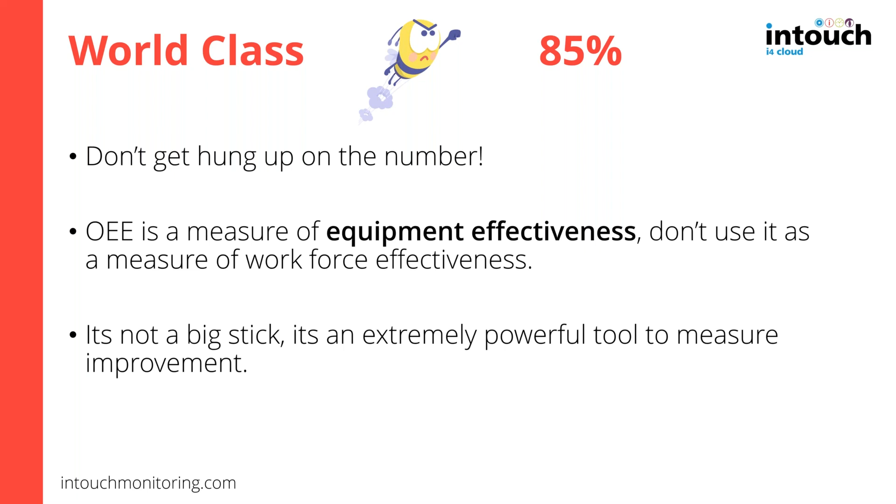So why use it? It tells us if a piece of equipment can do what it's meant to do, and if it will enable you to deliver what you are meant to deliver. So as I say, it's not a big stick. What it's really good for is helping you identify what your losses are and what is causing them. So if you are not meeting demand and are operating at a low OEE, you know that there is room for improvement. If you are not meeting demand and are operating at a high OEE, you know you've got a capacity problem. And even if you are meeting demand, with OEE you know if there are improvements there to be had. And at a really high level, I like these statements, but we need to delve deeper to understand where we are losing out and what we need to do to improve.

And this is where OEE really shines. When used correctly, it's an excellent tool to help you understand your losses and drive improvement. And it can also be a really good educational tool and be really quite motivating for the whole workforce.

So how is it calculated? I think anyone that's even lightly touched OEE knows that OEE equals availability times performance times quality. And if you don't know this, then I'm probably going to be missing some stuff out. But hopefully, as you're here, you do know the basics. But if not, there are lots and lots of resources available online.

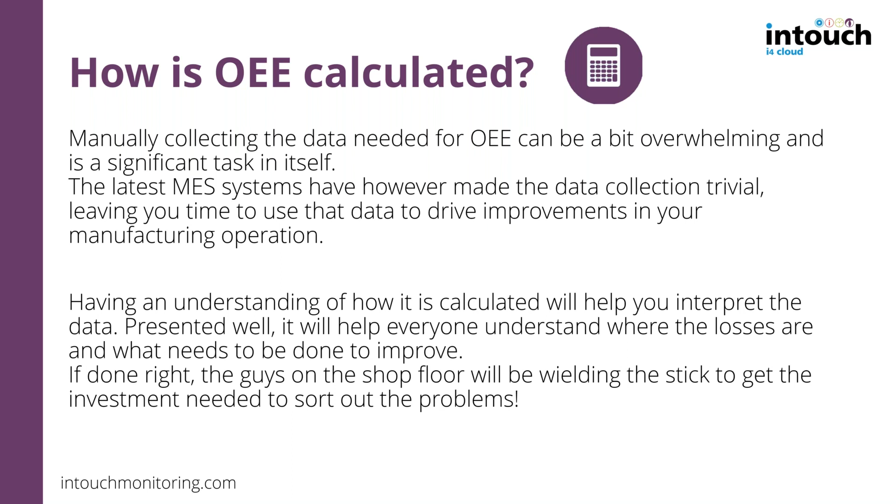And when it's presented well, the data can very clearly highlight this. If it's used as an improvement tool and as an educational tool, then you can get the whole workforce behind it. So OEE in itself is quite a useful benchmark, but we do need to dig further to be able to analyse where our losses are and what we can do about them.

So as mentioned, I'm not going to go into the maths in any detail, but it is important to understand that OEE is a ratio and so can therefore be derived from any relevant units. It can be very powerful to express it as a ratio of durations, how those losses relate to time. And lost time is something that's very tangible.

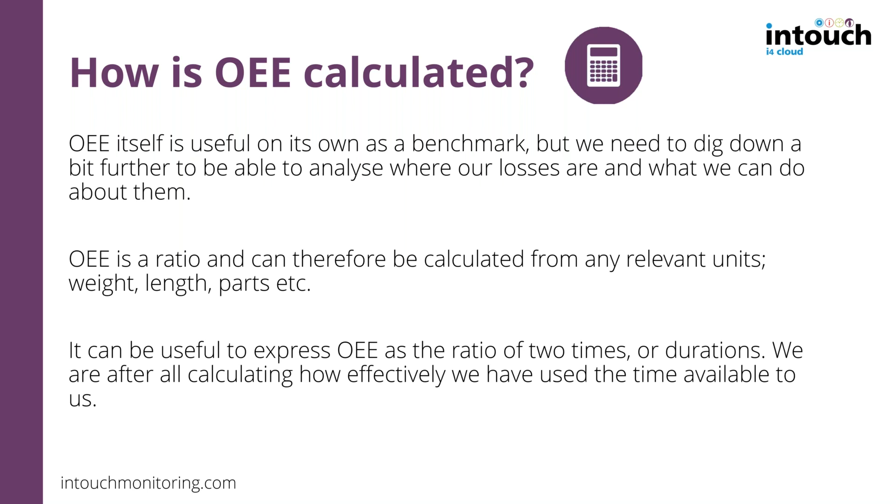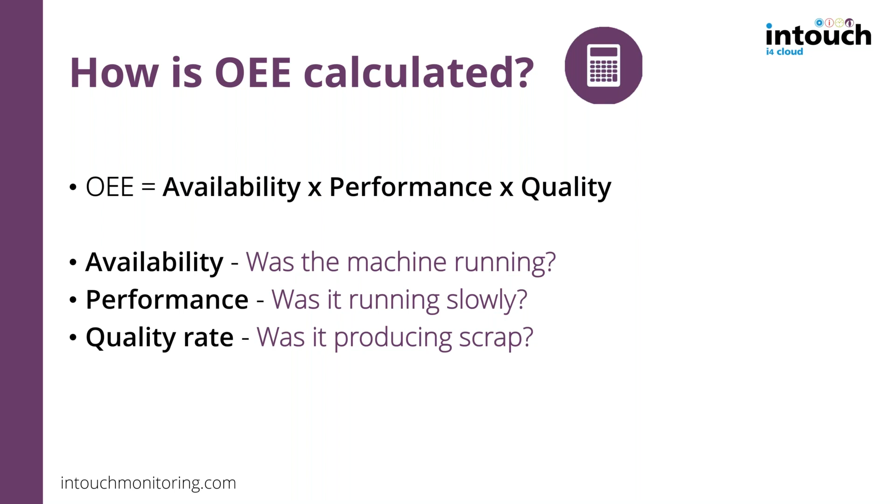So we said that OEE equals availability times performance times quality. So it's made up of those three distinct KPIs. So availability, was the machine running? Performance, was it running slowly? And quality rate, was it producing scrap? And if we try to stick to representing the information as times, it can be very nicely represented by what we call the OEE staircase.

So starting with availability, the availability rate is a measure of how successful we have been in keeping the machine running, simply calculated as a ratio of run time to available time. And so this, on our staircase, we're highlighting the losses due to unplanned downtime.

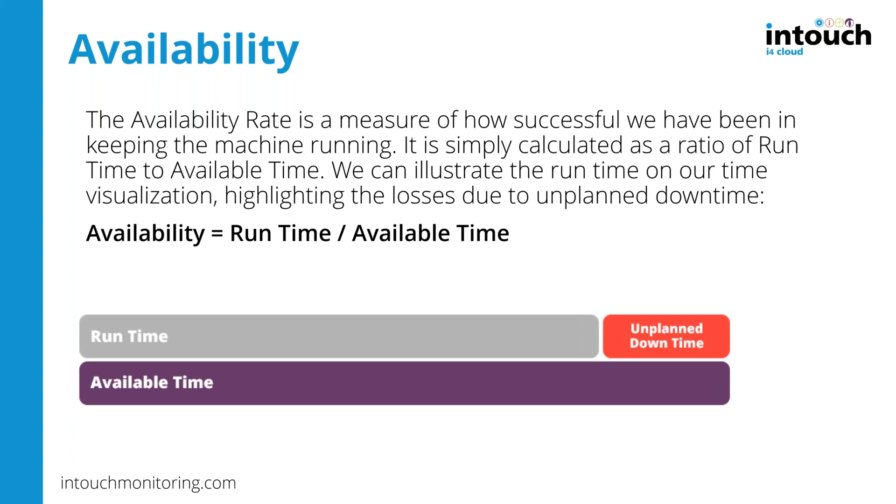The performance is a measure of how well the machine ran when it was running in terms of rate of production. So it's a ratio of the parts made to the number of parts you should have been able to make in the given run time. I've got here performance equals standard time produced divided by run time. So that's essentially just converting the parts made into time.

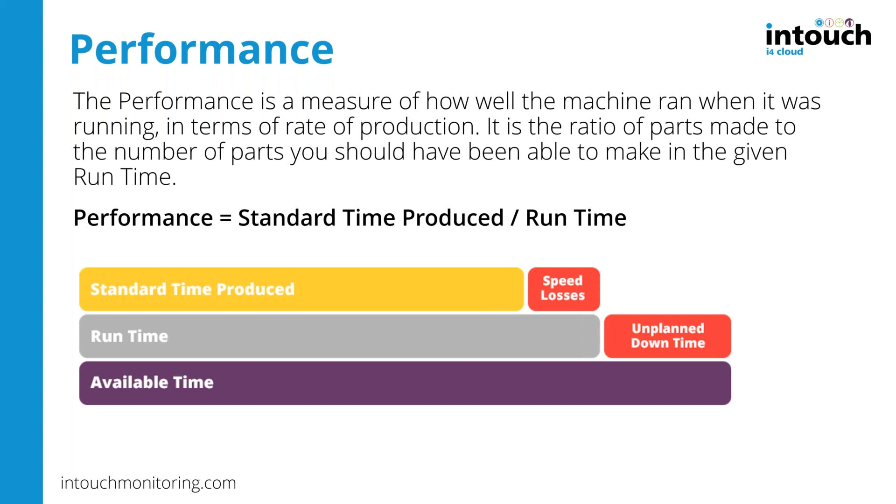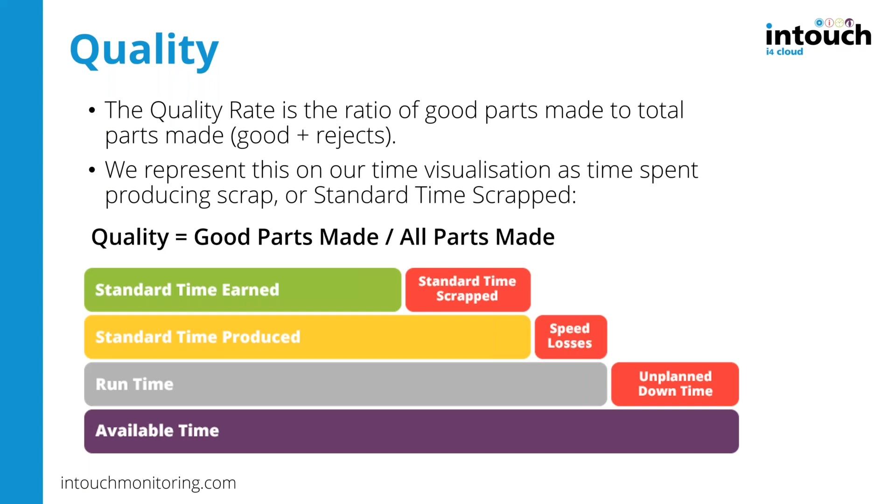So parts made times standard time or standard cycle is the time it should take to make the parts you made if the machine is running at its maximum possible rate. So we call that the standard time produced. And quality rate is the ratio of good parts made to total parts made. And again, we represent this on our staircase as time spent producing scrap or standard time scrapped, and time spent producing good parts, so standard time earned.

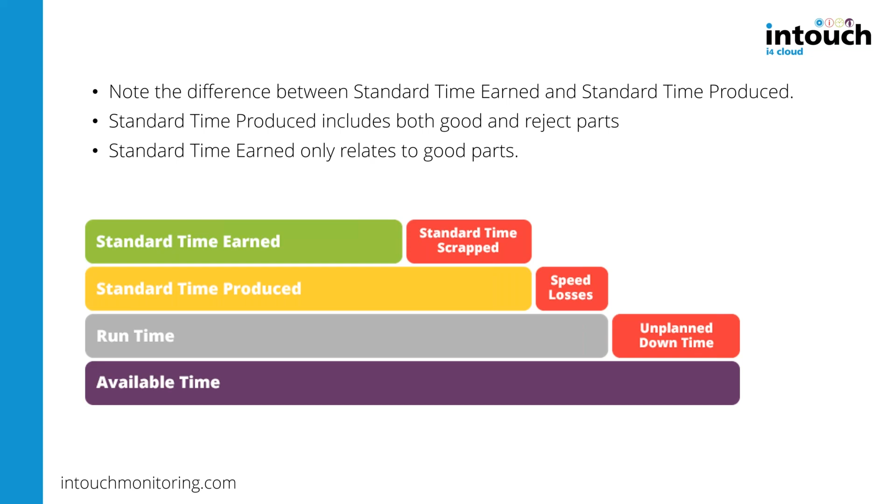So it's good to notice the difference there on our staircase between standard time produced, which includes both good parts and reject parts, and standard time earned, which only relates to good parts. So you can see that the productivity of the machine is broken down into a series of ratios of time periods. So the availability equals the run time divided by the available time. Performance equals standard time produced divided by the run time, and quality rate is the standard time earned over the standard time produced.

We know that OEE equals availability times performance times quality, and therefore it equals standard time earned divided by available time. So I said I wasn't going to go into the maths, but there is a breakdown of all of those calculations on our OEE explain page. But the staircase is a great way to look at how the different losses chip away at the time you had available to make a good product.

So we can add one further level to our staircase and include planned downtime. Near the beginning of my presentation, I mentioned manipulation of data and people trying to make the numbers look as good as possible. And so it's a good time to come back to that. Planned downtime can be one of the most contentious variables when monitoring OEE. Different people have different ideas about what should and shouldn't be included in planned downtime.

So for me, non-work shifts are clearly planned downtime. So if I'm running 5 days a week and I don't run the weekends, those non-work shifts are clearly planned downtime. But what about tea breaks or maintenance, no orders, no operators? I've heard many compelling arguments for and against including these as planned downtime. I've been in many meetings that have gone on for 3 or 4 hours where people have discussed and argued about what should and shouldn't be included.

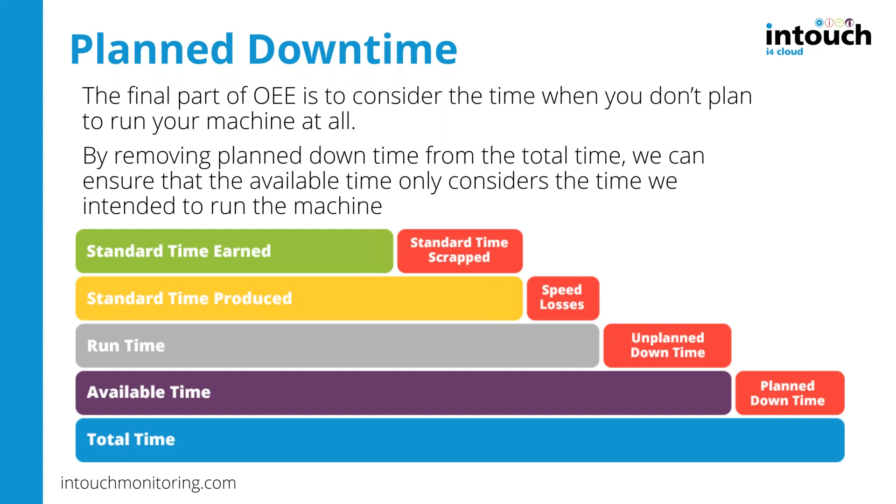So I've put some numbers into each box on my staircase just to bring a little more context. So I'm considering here one piece of equipment for 1 week. So my total time is 168 hours in that week. Now, I don't run the weekend, so I've got 48 hours of planned downtime. So my available time is 120 available hours.

Now, of that 120 hours, I actually only ran the machine for 108 hours. So I had 12 hours lost to unplanned stoppages. So my availability was 90%. And of the 108 hours of run time, I only actually earned standard time produced of 103 hours. So I've lost 5 hours to running the machine slowly, giving us a performance of 95%.

And then I also had some scrap. So I have 3% scrap, I have a 97% quality rate, and so I've lost 3 hours due to making scrap. So of my 103 hours of standard time produced, actually only 100 hours were making good parts. So of my 120 hours available during the week, I've only actually made 100 hours worth of good stuff.

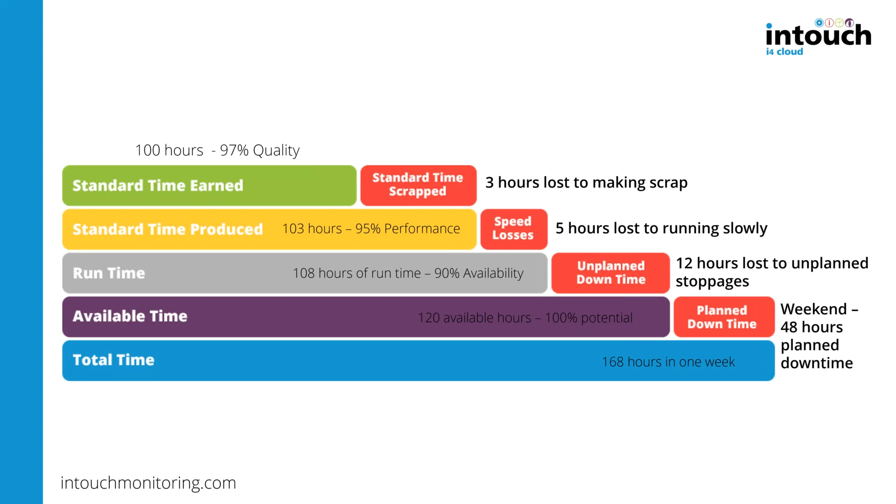So each of our KPIs are very good, they're 90% plus, but it gives us an OEE of just 83%, which is pretty good, not quite world class. But looked at another way, we lost 20 hours of potential output in 5 days. So we've lost almost a day's worth of output in just 5 days. And I think that's a very tangible message.

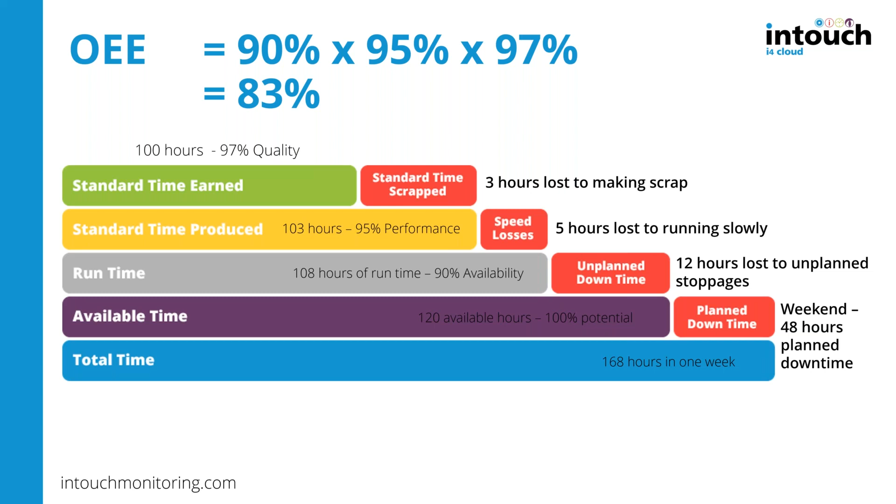So where do we go from here? Well, the next step is to look at those losses. What were the biggest causes of downtime, biggest causes of scrap, and so on? Isolate those problems, address them, and then measure the improvement. But that's probably further discussion for another day. I'm just about out of time, so that's me. It's a brief overview of OEE, why and how you should use it.

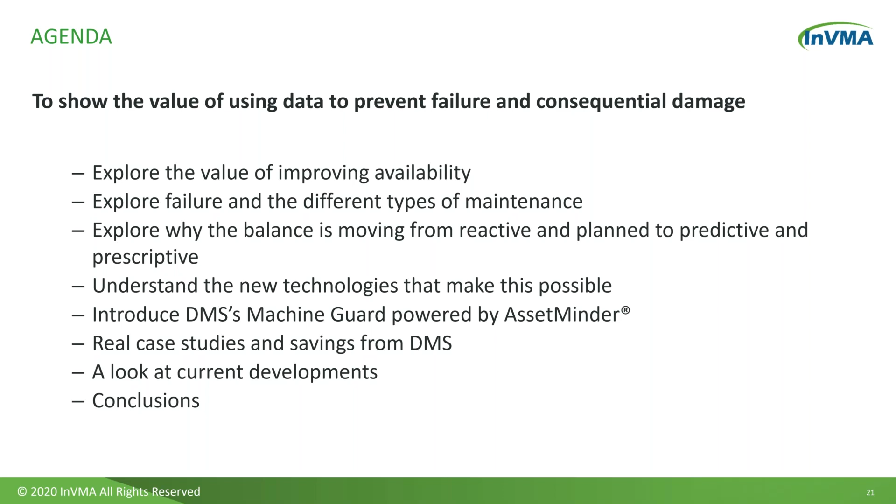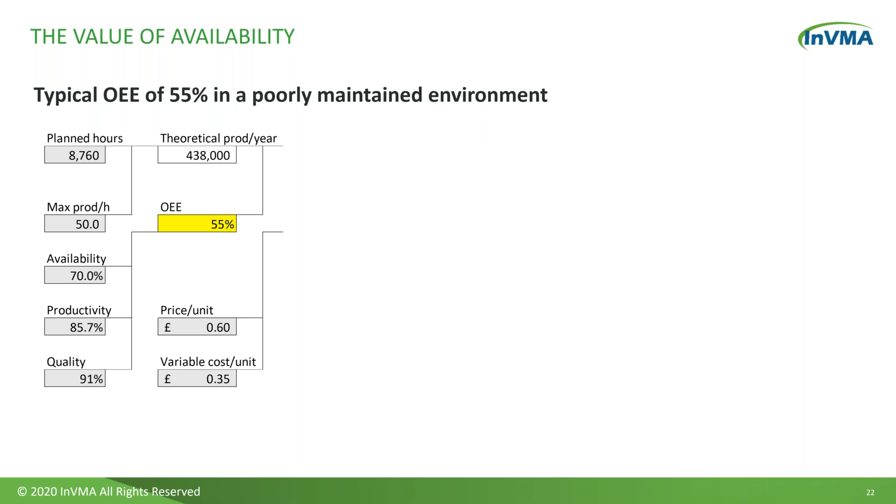So typically, if you had a typical OEE of around 55% in a poorly maintained environment, you can see, as John was speaking about, the quality 91%, productivity 85, gives us a low OEE of 55%. Please click ahead, John. And if you look at that from a return on capital employed, so this is one, and I used to be a bean counter, so I can say it, one for the bean counters. The OEE has a direct contribution to the return on capital of the machine. Basically, you've paid for a lot of capital, which is sat idle. Next slide, please, John.

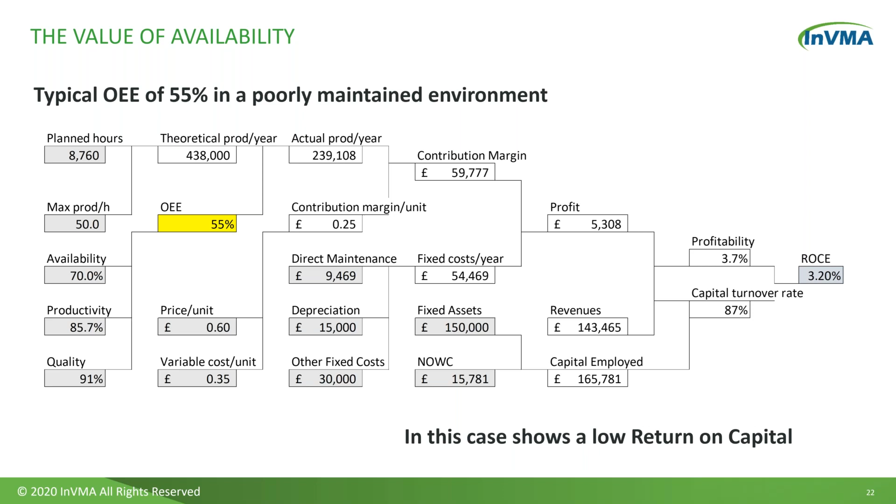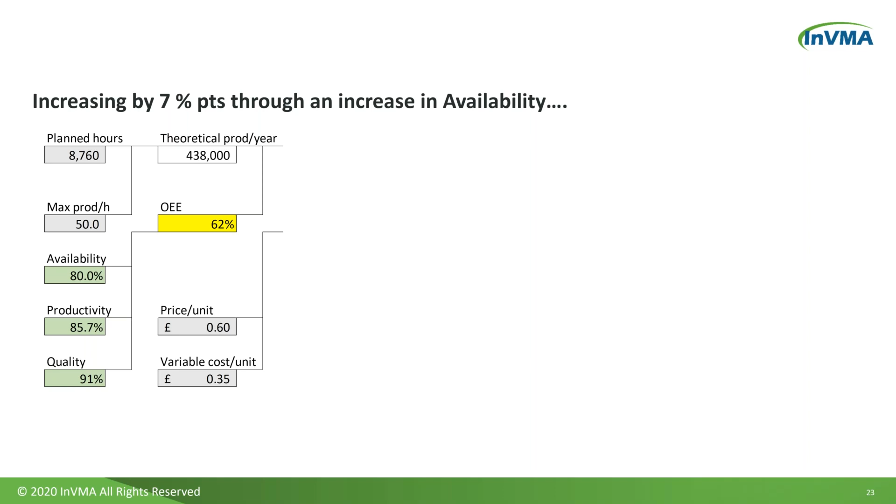But this is generally what we find, is that small movements in improvements in availability and the impact that has on the current productivity and quality that you're getting has a significant output on the return on capital, and can easily justify some of the investments that you're making on the improvements.

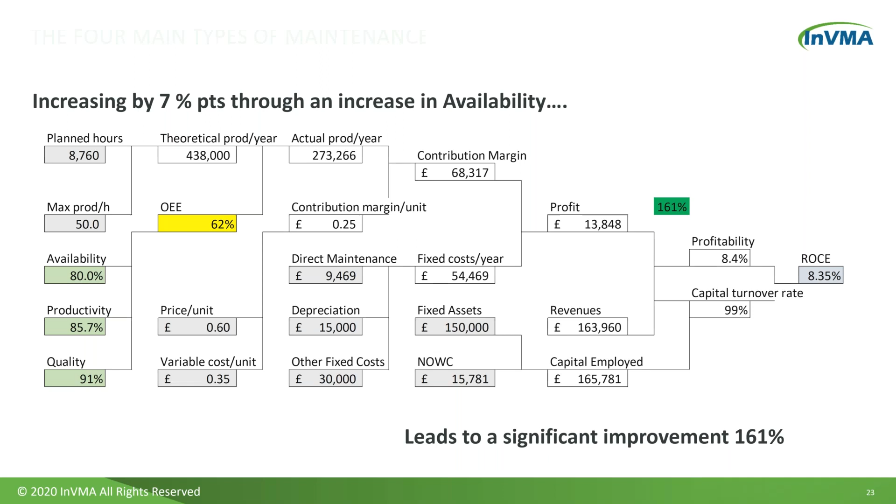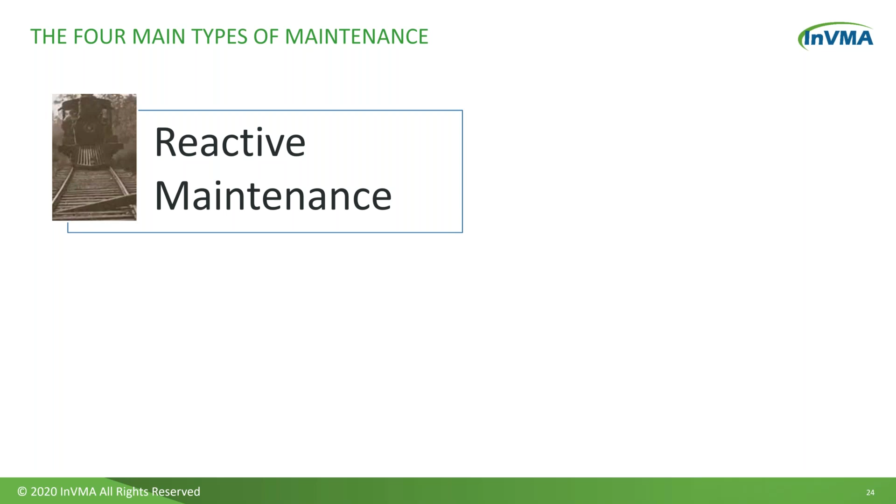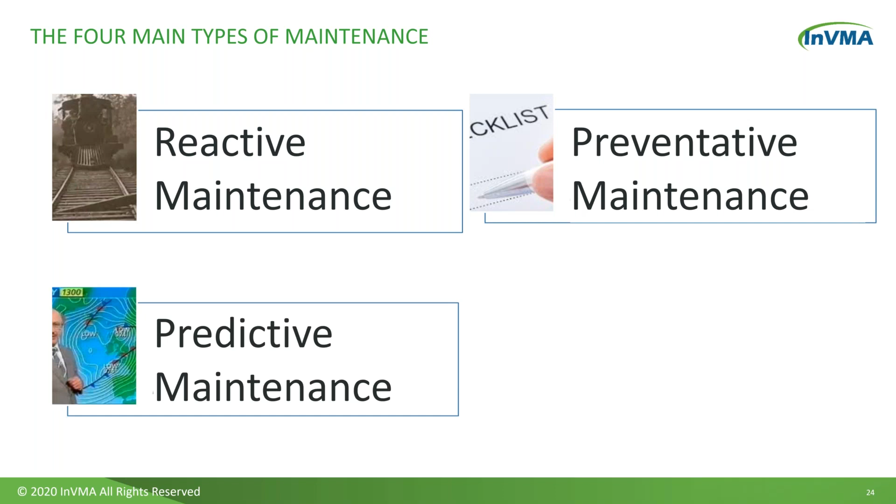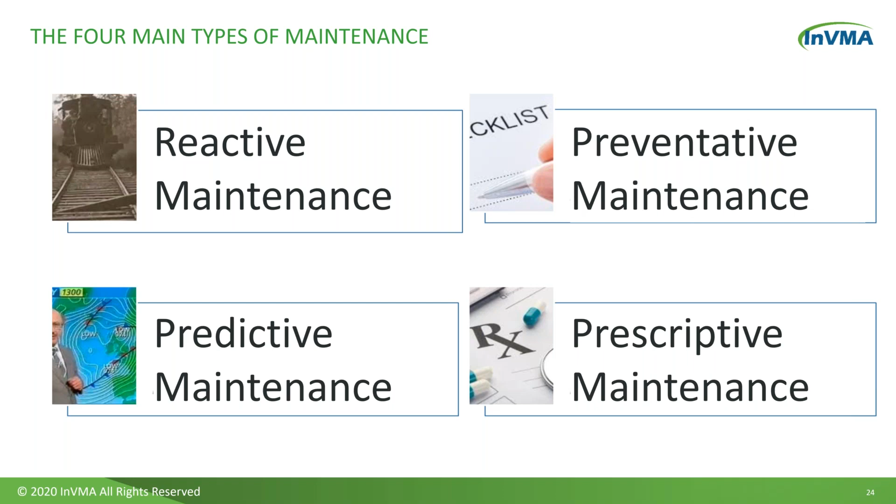Next slide, please, John. So the 4 types of maintenance are reactive maintenance, where you literally do the old break fix, or the smoking maintenance as we call it. Preventative maintenance, where you're using the outputs normally from the OEM that's provided the information for you to do servicing. Then predictive maintenance, where you're actually using the data from the machine itself to predict failure. And then finally, prescriptive maintenance, using the data from the machines to actually prescribe and tell you what needs to happen so that you can plan and put that in place. So go on to the next slide.

The case for condition-based monitoring is pretty straightforward. For some manufacturers, research we've done shows that a 10% reduction in maintenance costs is equivalent to a 40% increase in sales on the factory P&L. The best overall equipment effectiveness is 97%. World class is 83 or 85, that sort of area. The average is about 66. What this means is nearly a third of the investment that a company has made in capacity in its assets is wasted.

So much of this waste is driven from poor quality or unplanned downtime, as we've seen. However, machines really do give plenty of warning if they're in distress. Their vibration signatures change, their oil quality maybe changes, their temperature starts to change, they start to run hot, pressures behave differently as well. So there's a lot of input that something's going wrong.

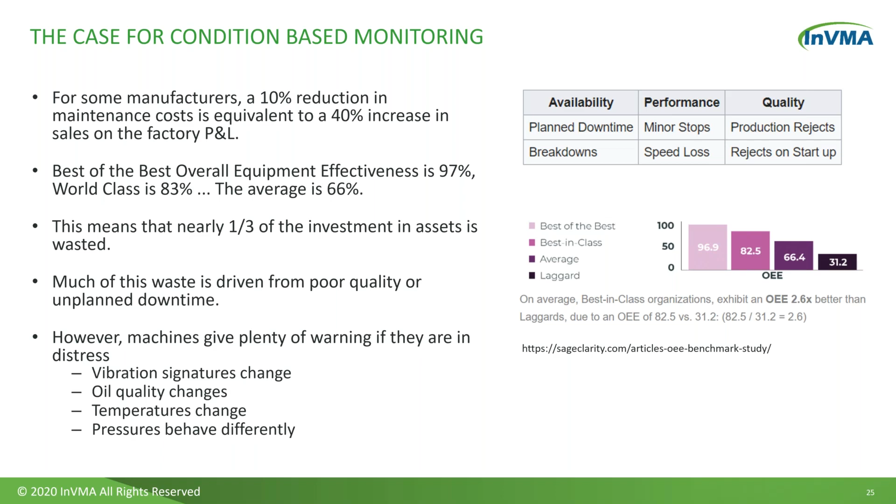Next slide, please, John. So really the key here is moving towards predictive, away from a reactive route. In a normal reactive process, the asset develops some sort of abnormal health condition, you get an andon light, an operator notifies maintenance, you get some form of work order, maintenance get called to the machine. There's a review of the sensors, a review of the situation, troubleshooting, a remediation task is done, and then there's some verification. And then you've got the machine back and running.

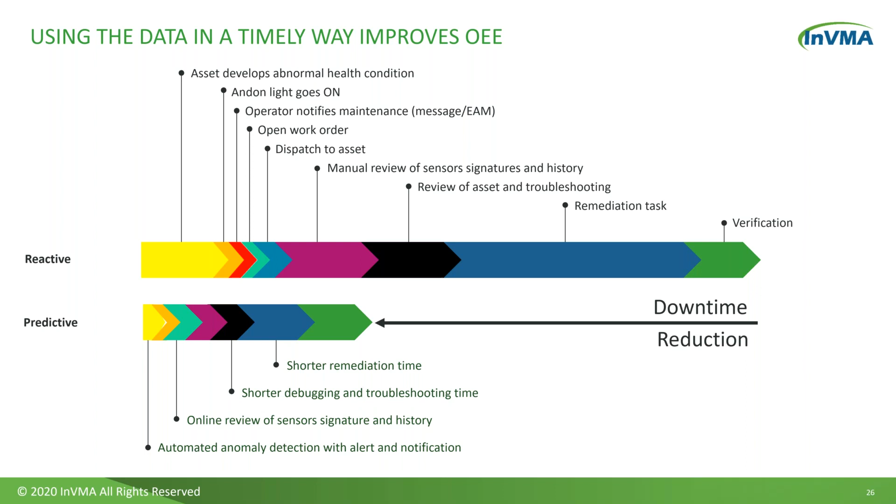So the case is obvious for this: a third of wasted capacity in manufacturing, and we know that we can get all this data from our machines. So what's been the problem in the past? Well, it's been CapEx. To get the data out of these machines and connect to them has historically cost a lot of money. Even then, you have to do the installation. And if you're doing any condition monitoring, you normally have a person in a van coming around with vibration sensors or accelerometers to identify if there's a problem.

There's also physical access, the irony of having to stop production to fit these sensors. And then finally, it's the skills, the interpretation of the data. The aging workforce retiring means your expertise has been going out the door. But also a culture where reactive is rewarded. And technically, there's not been that much confidence in the technology. So that's what we've seen stopping people. But a lot of those barriers have now been addressed. Next slide, please, John.

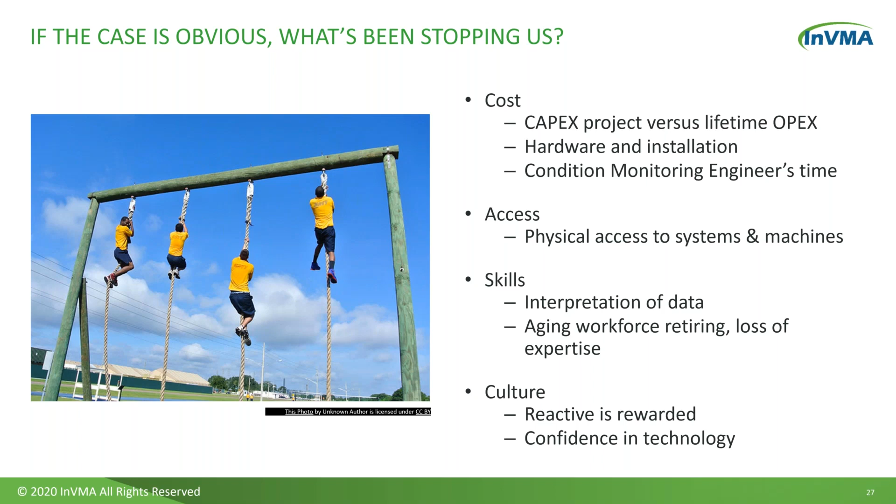So what's been happening over time is that the world of industrial automation, or OT, operational technology, and the world of information technology have started to converge, which is removing some of those cost barriers. Bluntly, the investments that have been going into the handhelds and mobile devices are finding their way into machines.

So the first thing is that a lot of original equipment manufacturers are now offering connected machines where they're shipping assets and machines with a rich array of sensors, and they're starting to use open and standardized protocols such as OPC UA, which is self-discoverable, and MQTT. These have been around for a while, but are starting to become present in most high-end machines that are being sold. What this means is the data is readily available and you don't have to do any retrofit.

Also, the edge gateways, these are industrial gateways that can connect to those machines to provide you connection to other cloud and analytics platforms, have become ubiquitous and very cost effective and also secure. And the availability of wired and wireless sensors is making getting hold of that data very, very straightforward.

Going across the top, industrial innovation platforms like PTC's ThingWorx and platforms similar to that are enabling companies to not only connect up the data from their machines, but also connect it into their current infrastructure of their MES or similar systems. Getting access to the data as well is very straightforward because most people have got some ubiquitous human-machine interface or their handset, the device that they've got.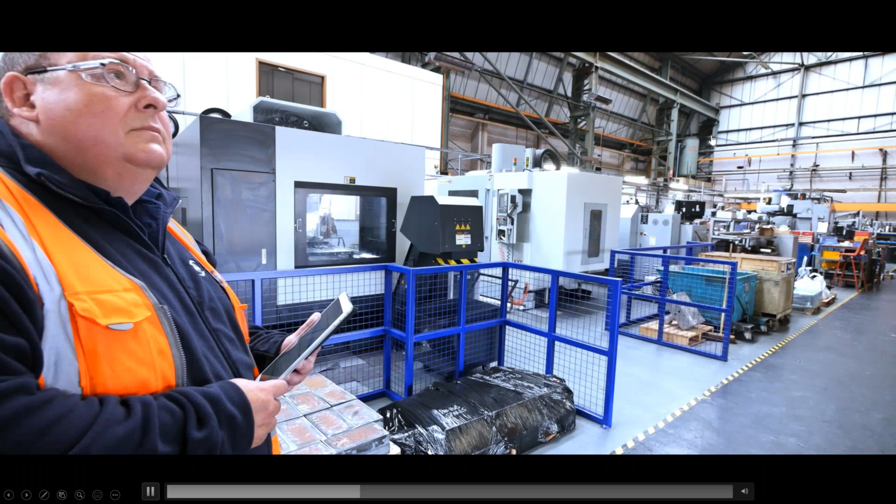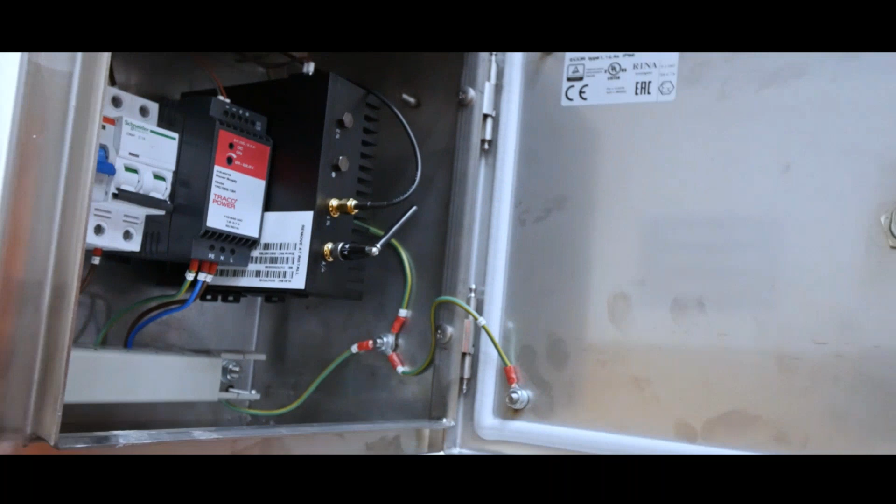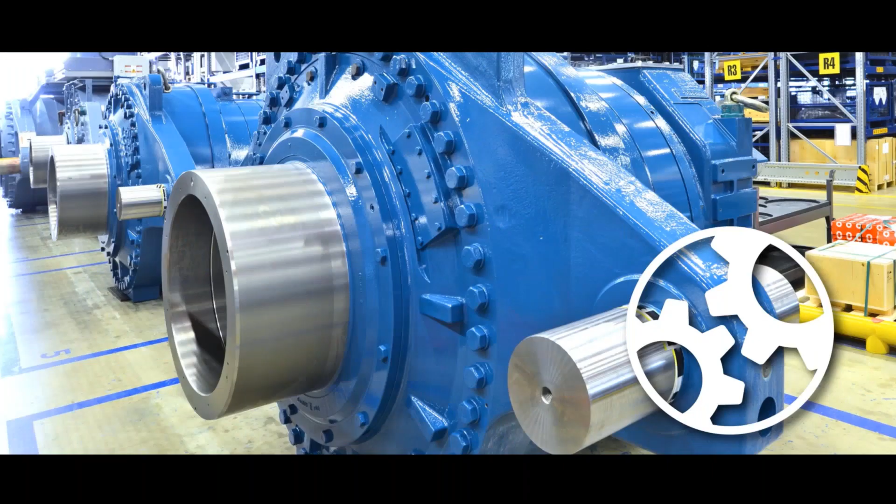Millions of pounds in lost revenue due to unnecessary downtime. We work closely with every client to identify their critical assets and outline the best way to apply the Machine Guard solution. The easily installed gateway can accept data from a wide variety of sensor types, including our cutting-edge Bluetooth vibration and temperature sensors, suitable for use on any critical rotating or reciprocating equipment, including gearboxes, electric motors, fans, pumps, and much more. And because it's a wireless solution, installation is quick and efficient.

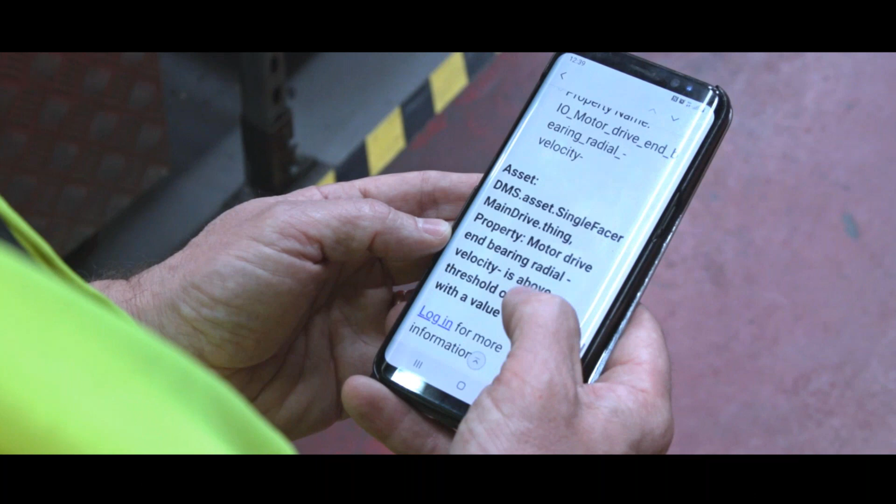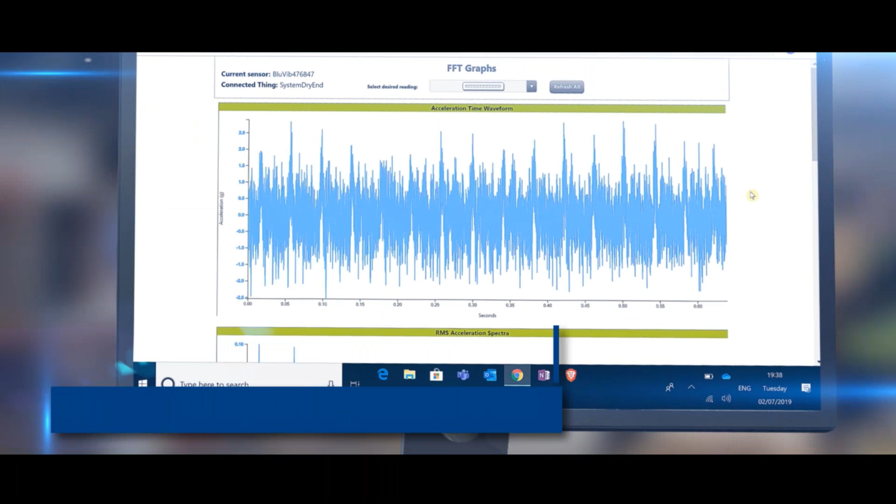Streamlined access means any internet-connected device can be used to monitor critical assets via the AssetMinder cloud-based platform, a powerful 24/7 managed monitoring system providing alerts that can be triggered using the format best suited to your business. From a single site to a global operation, Machine Guard, powered by AssetMinder, can provide the kind of all-encompassing protection your organization needs. Remotely identifying imbalance, misalignment, mechanical and structural looseness, bearing and gear damage, lubrication starvation, cavitation, and other potential issues. Welcome to the power of predictive maintenance.

Right, John, if you can go to the next slide, please.

So, as was describing there, gentlemen, what we've got here now is the future, but it's today. We've got installations now in the UK, probably on over 100 sites, monitoring some of them in excess of 1,000 assets. So the criticality of some of these assets, particularly like in your sector, in the plastics sector, is pretty important. And we've got the capability now to make things simple, effective, but to give real quantifiable data that enables us to make these decisions you see here.

So we can fit Bluetooth accelerometers that are recording the data seen before, quickly transferring the data via Bluetooth, and then it's up on the actual AssetMinder platform, where we can then look at the trends, look at the spectra, and actually work with the client to put a plan in place to enable him to ensure that no lost production is incurred, or if it is, it's got some control mechanisms in place. Next slide, please, John.

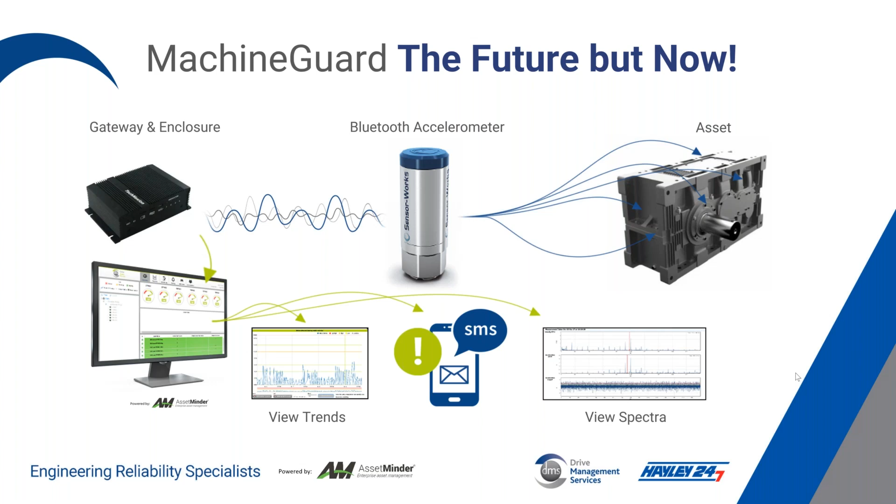So, just talking about our BluVib accelerometers, the beauty of these, they can be installed in minutes. There's no wires. We can drill and tap, we can use a 20 kilo pull magnet, or we can use hard epoxy, and they can be installed on your asset in a matter of no time at all. They're IP67 rated for particularly harsh environments, and we do a lot of work in environments such as quarrying, steelworks, water treatment, where the environment is pretty harsh, and these stand up to them rigours.

It enables the asset to be monitored continuously, or, if we want, on exception. They use a low power AA lithium based battery, which can be replaced. So the battery life, generally, depending on how often the data is sent, is anywhere between 12 months and 3 to 4 years. It uses the latest version 5 Bluetooth communication, which enables us to optimize that battery life and increases the actual data transfer speed.

And generally, they can collect the data from up to 50 meters away in heavy industrialized areas, such as your type of sectors. We have an ATEX version as well for hazardous areas, such as gas, fumes, dust, etc. Next slide, please, John.

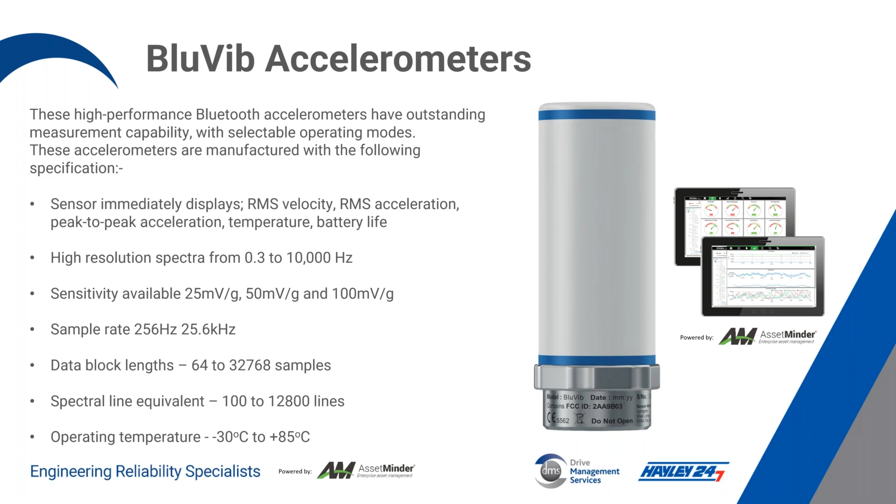All the other technical data there, although it doesn't mean a great deal to you guys, what it means to us as data analysts is that when we get this data in, whether we're looking at the low frequency or the high frequency, we can make decisions that are going to be extremely accurate. And in effect, it's like having one of my data analysts sat on your machine with a handheld data collector every minute of the day, taking data and actually performing some analysis on it. Next slide, please, John.

The gateways, as John mentioned previously on his slide there, within DMS, we use various types, predominantly the Technexion. We have used Dell in the past, Treon and Applicom, but these enable us to have pre-configured gateways that can connect remotely, and it gives us the capability to amend these configurations and add additions very quickly.

So, for example, we've got clients now who have a number of the sensors and gateways on site, and every time they want to add a new asset, we can send the accelerometers via a courier, and we can remotely dial into the gateway, add the new configurations, the new settings, so when the sensors are fitted, immediately they are talking to the platform. We have the best and most reliable gateway in the market with the highest mean time between failure, and each gateway is capable of communicating with approximately 250 BluVib accelerometers.

Next slide, please, John.

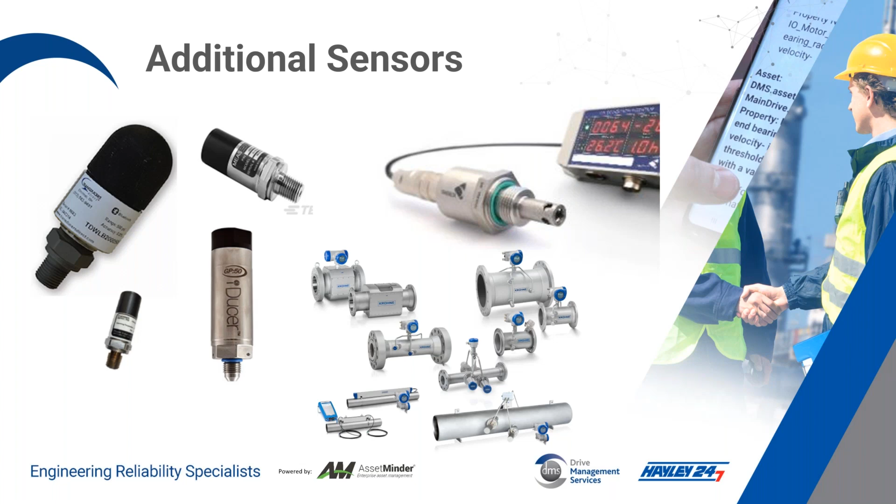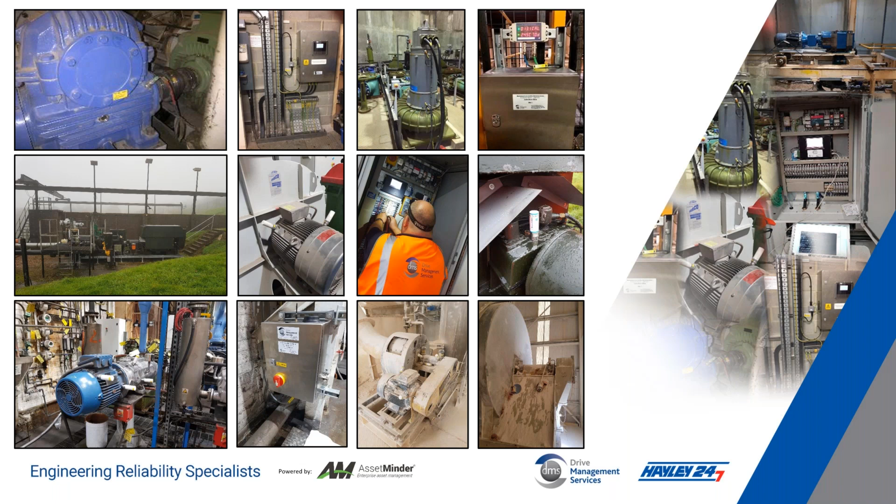So what I'm going to do now is show you a couple of examples, and this quick slide here just shows you some installations where we've got them at the minute. Everything from cardboard corrugating to water treatment to remote pumping stations to automotive production lines to RAF, aerospace fuel pumping stations to mineral processing to material handling in ports. Basically, you name an industry sector now in the UK and we have an installation in one of these sectors. Next slide, please, John.

So the first case study I'm going to show you is in a limestone quarry and milling facility in the UK. They provide limestone to the steelworks, to the water treatment plants. And within a matter of weeks, we were getting alerts via email sent to ourselves. And the big advantage of us being a service provider is we get the same alerts that all our clients get. So whether you get an email, SMS or even voice synthesis, my team of engineers get the same alerts. So we started to look at the stack fan up on the 4th floor of what's called the Hydrate building. We've seen the data, and when doing the analytics, we said to the client, listen, we believe you've got a loose motor.

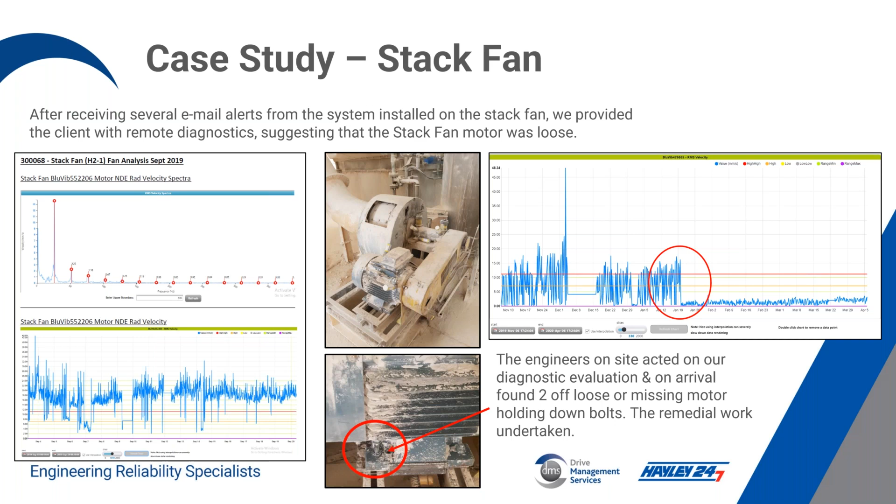On its sister plant on the other hydrate, we installed it in what's called the Microsep fan, which is a critical fan. If this fan fails, this complete milling facility can no longer produce. And what we saw from the alerts when doing the analytics was cage defects and harmonics in the spectra, which normally means we've got the onset of bearing damage. So we spoke to the client and explained this, but his issue was they had a massive production run and they didn't want to stop until the second week in October when they had a maintenance window planned.

So what we agreed is every day we would analyse this, work with the client and ensure that we would oversee and try and get through to this thing. So we'd inform them, put some more lubrication in, keep a close eye on it, and work really close. So if you go to the next slide, please, John.

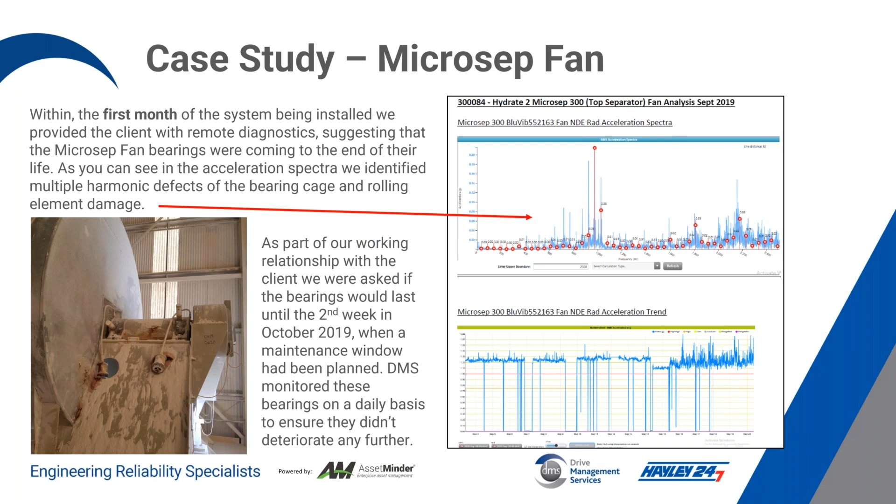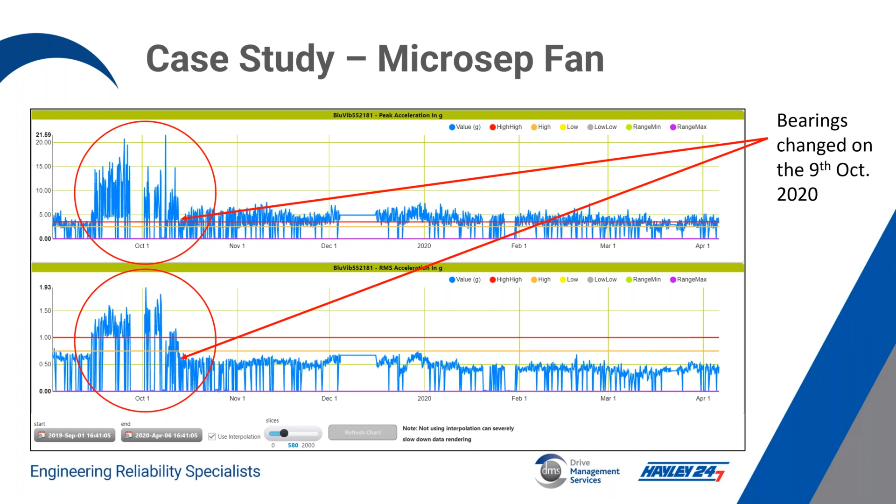What we saw over that period of time, once they got to October, was we managed to bring the bearings down to an acceptable level, and the client was absolutely over the moon. And ever since then, this particular client now has got 7 installations on critical parts, from ball mills through to vertical pendulum mills, etc. Go to the next slide, please, John.

So whether that be a simple system consisting of 6 Bluetooth accelerometers and a gateway, the data we can produce and the analytics we can assist you with is absolutely cost effective. Next slide, please, John.

So what are the benefits? The benefits we use in our kind of platform and the AssetMinder using Machine Guard is that we've got the remote system adjustment using the inbuilt Kepware and Ubuntu on the gateways. It means that additional sensors can be added quickly and professionally.

All types of sensors can be monitored in our systems, such as oil condition, oil temperature, using a patented oil quality sensor called the TAN Delta. We can measure flow, pressure, running speed, ultrasound sensors. And this enables us to monitor the all-round condition and health of the machine, so not being restricted by the traditional condition monitoring sensors like a lot of their competitors do.

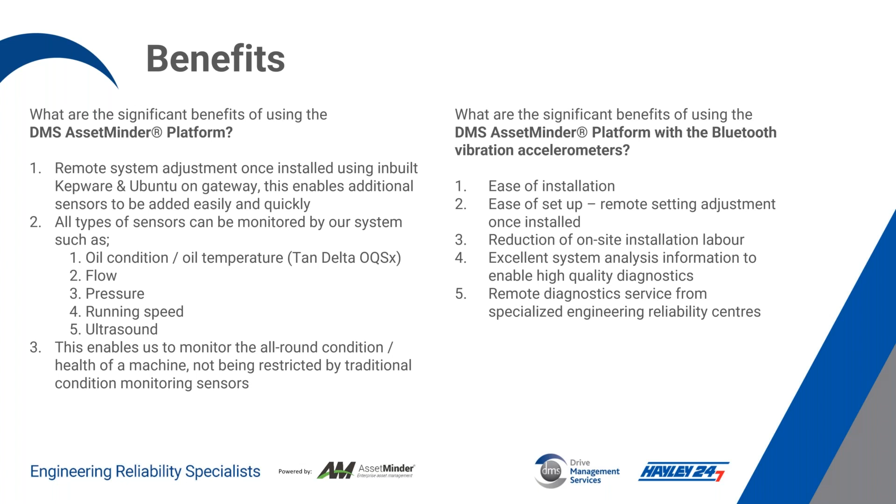Going forward now, and working with John's team at InVMA, and that's why we're a true partnership, is what we're looking to do now with our AI, our artificial intelligence. We've got automated threshold setting and anomaly detection that's going to enable us to find real-time anomalies. It will enable us to observe and have machine learning in normal state patterns, and we're doing some testing at the minute with electrical signature analysis, doing the same thing.

We've got no need for setting rules or applying predetermined calculations. We can actually have that automated by the system. And what we can do is deliver true alarms based on what we're seeing. So when we're making decisions, it's real live data that's allowing us to talk to you guys, the end client, and say, right, these are the decisions you need to make, quantifiable decisions. Next slide, please, John.

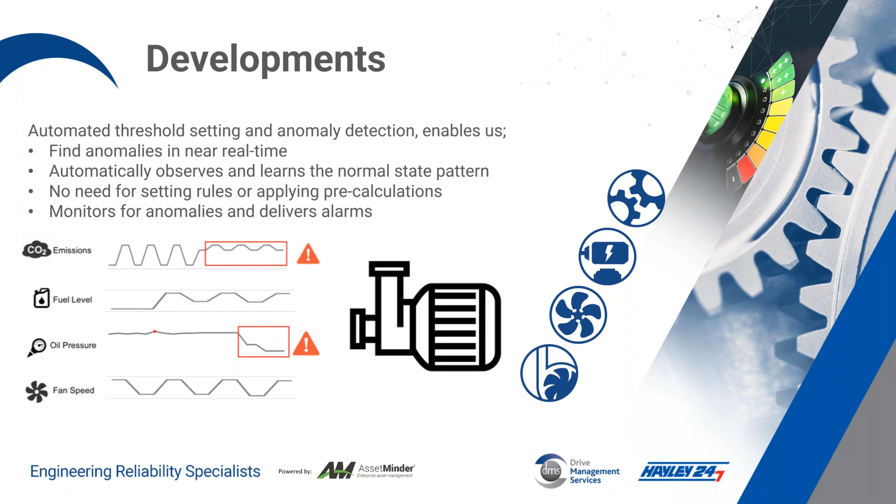So, what's machine learning going to do? It's going to enable us to predict the time to failure, and it'll enable us to apply this machine learning not just to current data but to historical data. So then what that starts to do is enables us to predict future outcomes.

So if we see this particular change in the curve, in the trend, then we can make a decision and talk to the client, and they can make insightful decisions based on intelligence that will actually improve the OEE on plant and actually reduce the downtime, which is the marketplace we're in. And it's about completing that circle from where clients have been historically in reactive to actually being in the prescriptive field and making that transition along the way. Next slide, please, John.

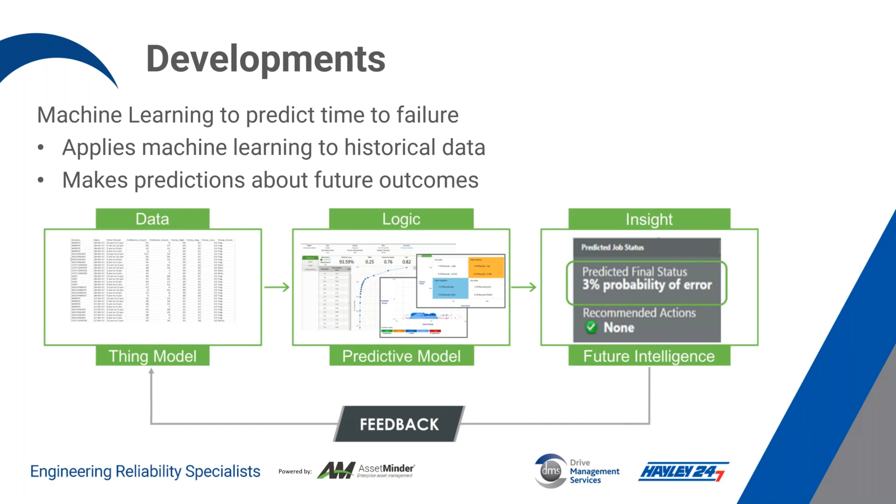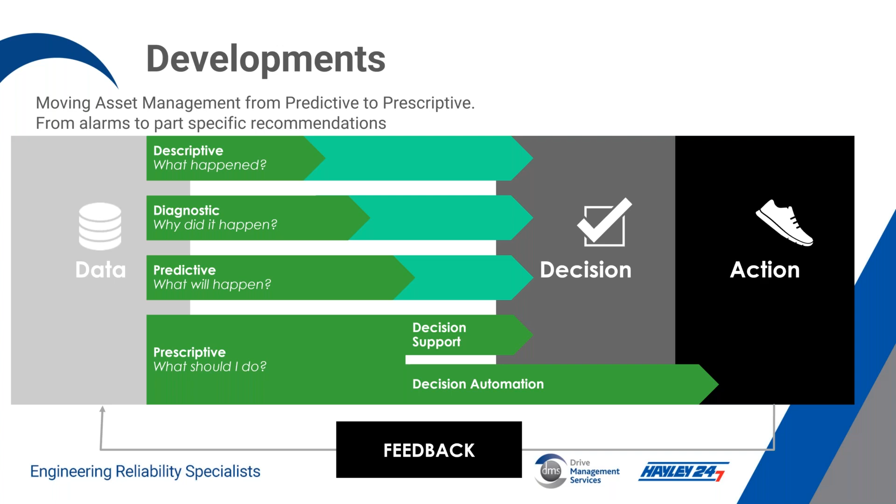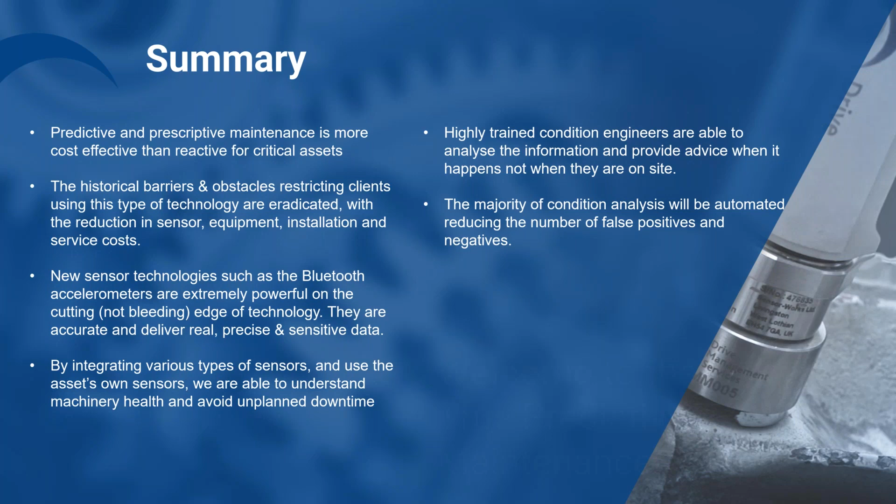So finally, our offering is based around our service. Like we said previously, the majority of competition are equipment manufacturers. So they're more interested in selling the equipment. They don't have the same service ethics that we do. That's part of our DNA. We're a 24/7 business doing everything from reacting to being prescriptive.

Our people are our strength, highly qualified diagnostic engineers employed to support all our global clients. And that's the most important part of our business, because sensors will change, sensors will develop, but the important thing is our people. The case studies we presented today demonstrate how highly developed IoT technologies enable our people to deliver real quantifiable savings and results.

And this remote monitoring, as it develops, will enable us to all be regularly in touch with our clients, so we become a true partner without necessarily being on site all the time, delivering a real value-added service. As the technology develops further, we'll be able to implement the machine learning on various machines. This will provide machinery health data which is far above and beyond the traditional monitoring methods. So welcome to the power of true predictive maintenance.